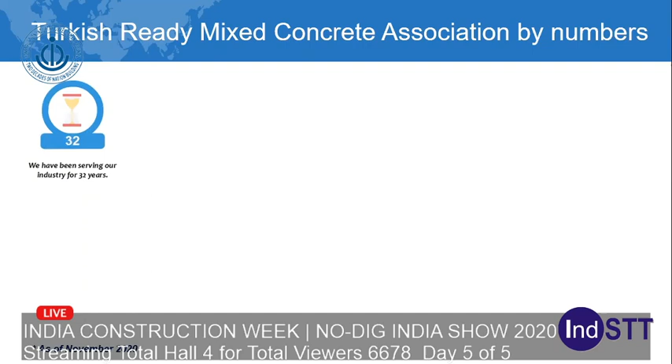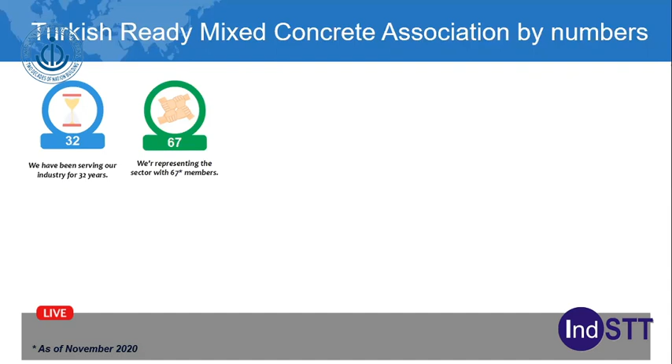Let's start with the Turkish ready-mix concrete industry, and let me introduce you to the Turkish Ready-Mix Concrete Association. We have been serving our industry for the last 32 years. We represent the sector with 67 members, which represents 70% of the whole Turkish RMC industry. We work hard and effectively with our 31 employees, and with 157 industry experts within 4 different committees of THBB.

We have provided trainings to more than 16,000 industry employees in the last 32 years. In 2019, we organized 25 trainings and seminars all over Turkey. In the last 2 years, we have provided practical, economic and safe driving trainings to more than 1,600 operators.

We are a member and the regional system operator of the Concrete Sustainability Council, located in Geneva, Switzerland. This council was founded to implement a certification system showing how concrete and its supply chain are environmentally friendly and sustainable construction materials. In Turkey, we have certified 12 companies, including concrete and cement plants, in the last 2 years. As THBB, we organized 28 congresses, fairs, and competitions in the last 32 years.

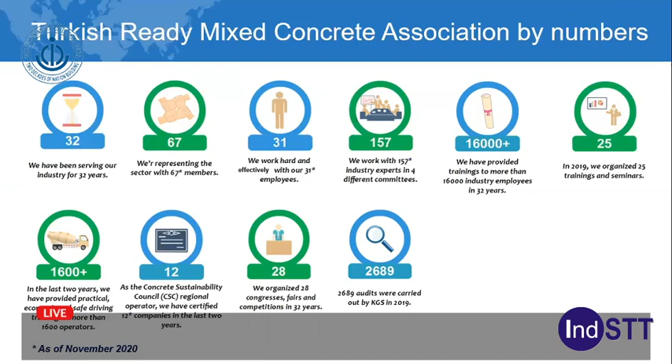We have an enterprise called KGS, a third-party certification body, through which we've performed 2,689 audits in Turkey. We also have a building materials laboratory at THBB, where we have performed concrete strength tests, mechanical tests, chemical tests, and calibration services for all our members and for all the stakeholders.

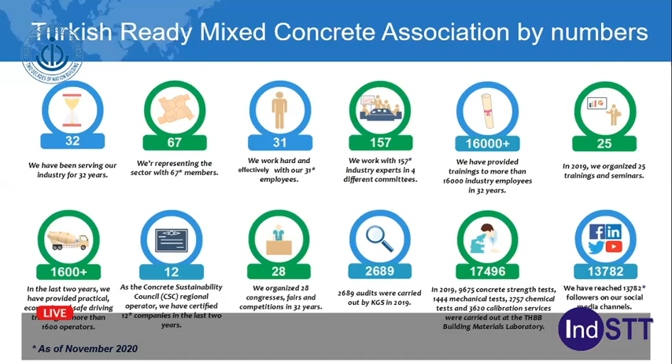We have reached more than 13,782 followers on our social media channels such as Facebook, LinkedIn, Twitter, and YouTube. These are the numbers as of November 2020.

Let's look at the sectoral statistics. Here you can see the RMC production of Turkey. In 2017, we reached a value of 115 million cubic meters. When we started producing RMC in Turkey, by the end of the 1980s, the production amount was around 2 million cubic meters. Now we are producing 67 million cubic meters.

If we take into consideration the amount produced in 2019, the annual production per capita in 2017 was 1.43 cubic meters, and in 2019 it was 0.82 cubic meters.

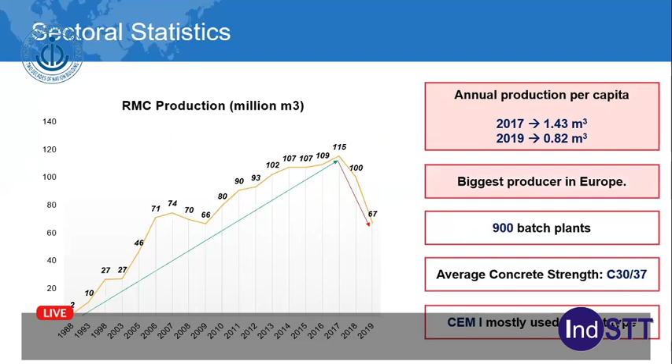We are the biggest producer in Europe. As you can see here, when we take into consideration the total amount produced within the European Union, in 2019 it was around 260 million cubic meters, and as Turkey, shown here in red, we produce 67 million cubic meters.

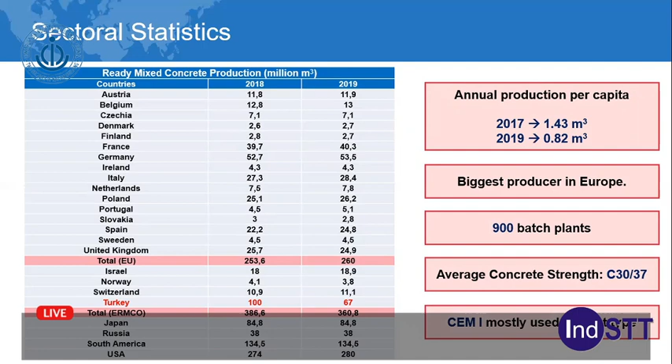We have 900 batch plants in Turkey. The average concrete strength used in Turkey is C30-37, and CEM1 is the most used cement type in Turkey.

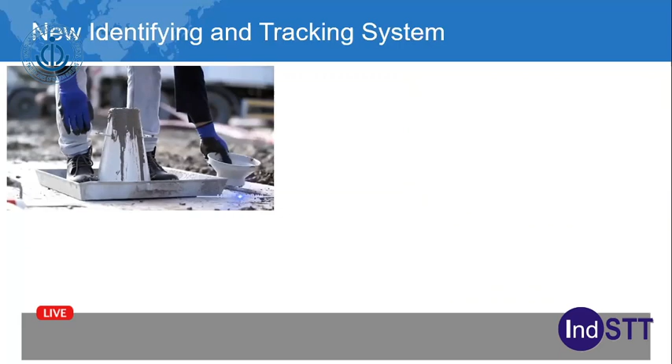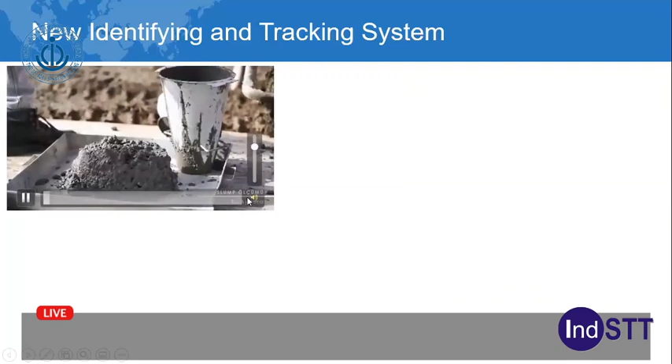I will present very briefly a new identifying and tracking system which is actively used. As Turkey, we have the building inspection system, and in 2019 a new directive came into force to ensure full control of concrete in compliance with the new earthquake code and to enhance the traceability of concrete quality to the end users.

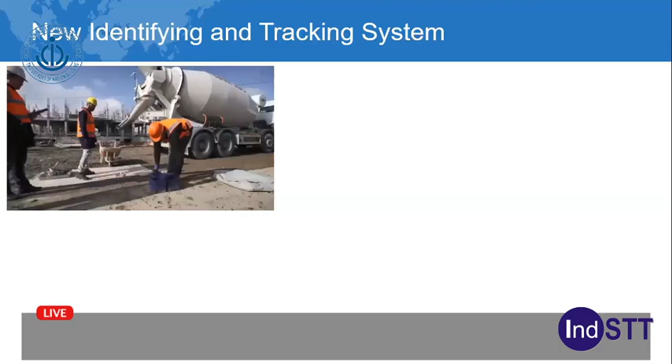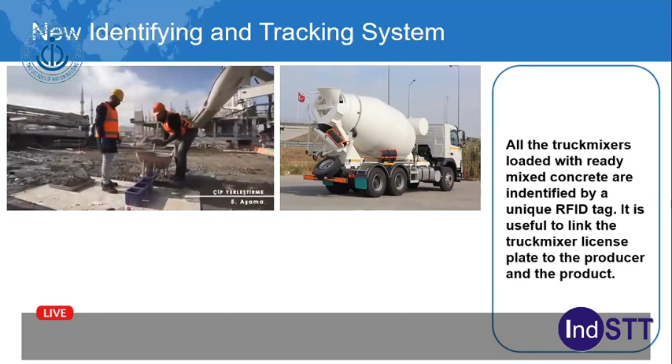For this purpose, all truck mixers loaded with ready-mix concrete are now identified by a unique RFID tag. This is useful to link the truck mixer license plate to the producer and to the product.

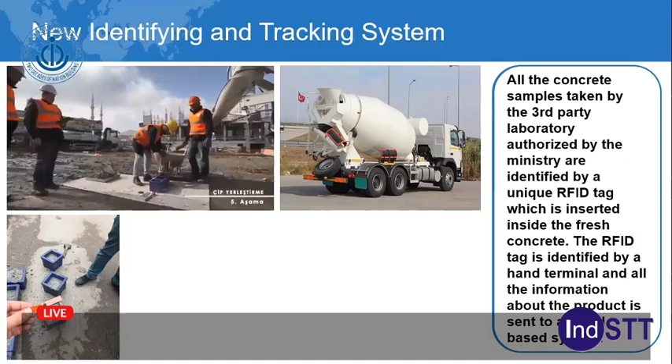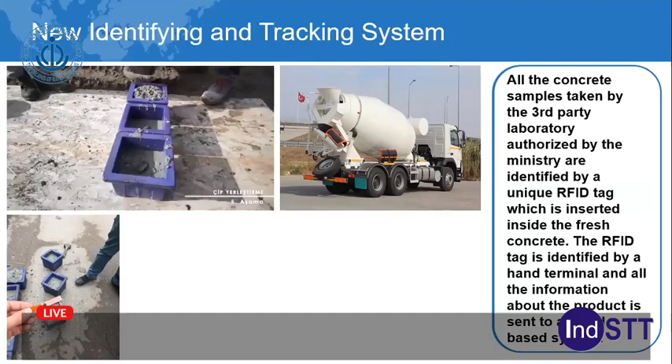All concrete samples taken by the authorized third-party laboratory are identified by a unique RFID tag, which is inserted, as you can see in this video, inside the fresh concrete. The RFID tag is identified by a hand terminal, and all the information about the product is sent to a cloud-based system. The concrete samples identified by a unique RFID tag are stored in curing containers once they are demolded.

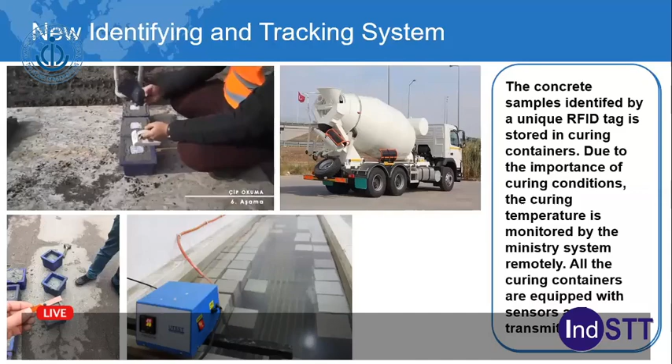Of course, the curing conditions are crucial, so due to their importance, the curing temperature is monitored remotely and digitally by the ministry system. All the curing containers are equipped with sensors and transmitters.

When the concrete specimen is tested to measure its compressive strength, the compression testing machine can recognize the specimen by its RFID tag. All compression testing machines located at third-party laboratories are equipped with RFID tag readers, and after the test, the results are saved by the cloud-based system.

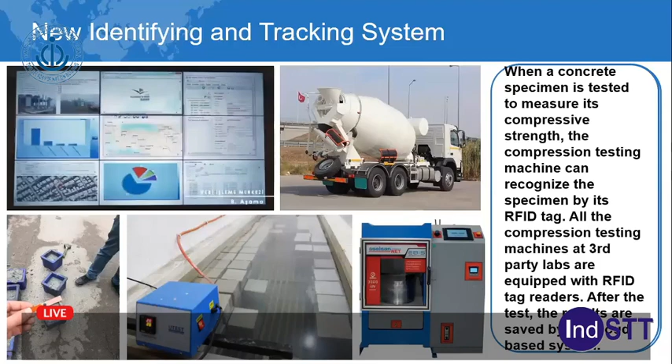By this directive, which came into force in 2019, the identity testing obligation was extended, and the concrete samples are digitally tracked.

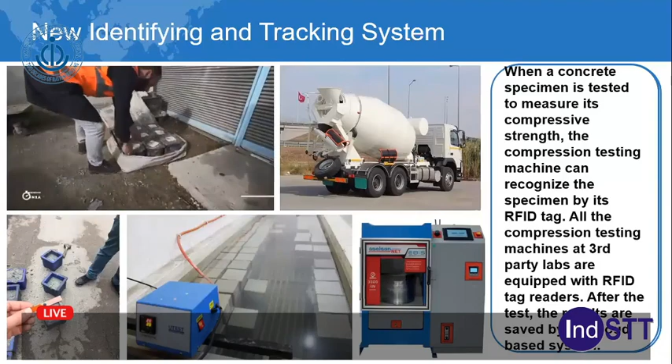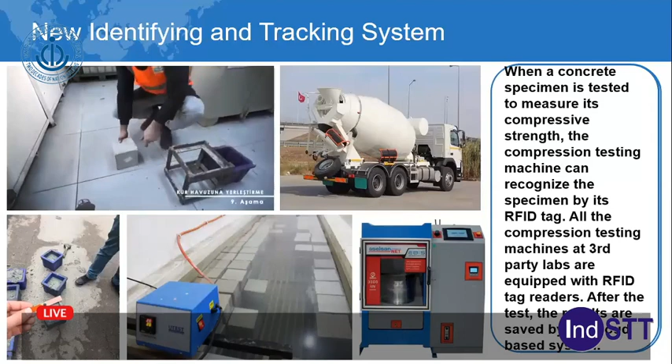Tracing the quality of concrete was the main purpose, but taking into consideration the actual status caused by the pandemic, I think this system is really helpful during this quite difficult period of pandemic also.

After the lockdown, starting from June 2020, an unexpected demand was realized, and the ready-mix concrete production has been continuing at a good level since June 2020.

Let me present you the RMC index. It's a study carried out by THBB in cooperation with an independent consultancy company. This company, on behalf of THBB, collects data from our members, and based on this information, the activity index, the confidence index, and the expectation index are determined. Taking into consideration these three indexes, the ready-mix concrete index is calculated consequently.

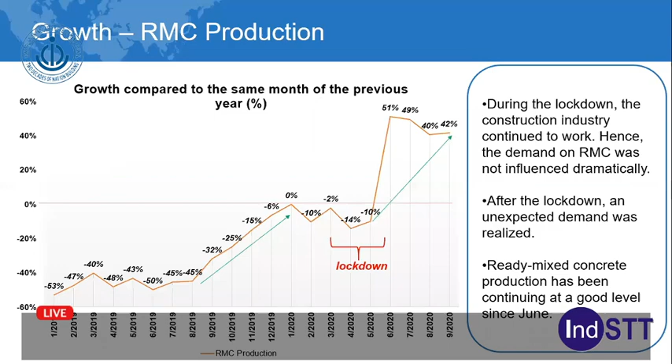So the issues related to the pandemic: cement shortage. Due to the shrinkage in the local market and the depreciation in Turkish lira, the cement producers focused on export. For this reason, the RMC industry had difficulties in supplying cement.

Unexpected demand: during the lockdown, the RMC companies preferred to shrink, both in human resources and equipment. But after the lockdown, unexpected demand was realized, as we've seen in the previous slide.

And the production cost: due to the influence of COVID-19 on the economy, inflation raised and the value of Turkish lira decreased, so the production cost increased.

Uncertainty is another important issue. The pandemic caused disruptions in all processes, and employees' testing and quarantine necessities created organizational problems, especially in production and delivery. Let's look at the best practices.

Here you can see the guide for ready-mix concrete companies during the COVID-19 pandemic. This guide was prepared by ERMCO in cooperation with the Latin American Federation for Ready-Mix Concrete, FIHP. It was first prepared in Spanish, then translated into English, and then all the members of the European Ready-Mix Concrete organization, ERMCO, had the opportunity to translate this guide into their own languages.

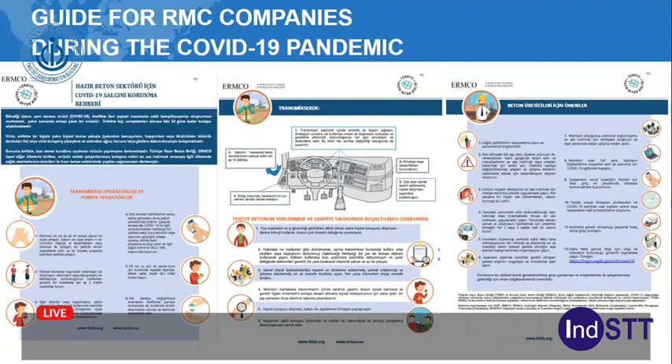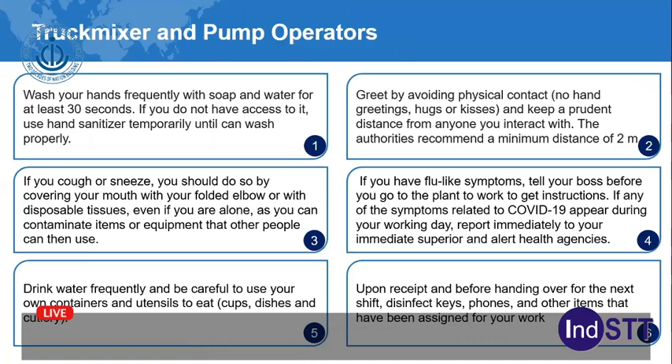The first part gives details on what should or shouldn't be done by the truck mixer and pump operators: what precautions should be taken in the truck mixer, and what should be done during the loading and unloading of concrete.

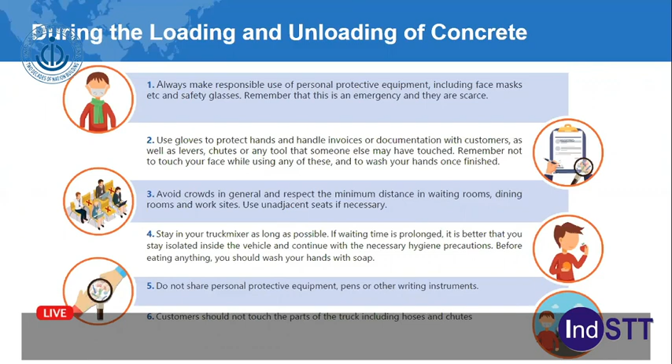If you would like more details on this guide, you can find it in English on the website of ERMCO, and the Turkish version on the website of THBB.

So let's look at the best practices: trainings. Here you can see an example, the hand washing trainings. To raise awareness, hand washing training kits were distributed to personnel, using UV light to mimic germs and spot the remaining germs on the hands after washing, to help them understand how properly or improperly they washed their hands. This is one example of trainings just to raise awareness.

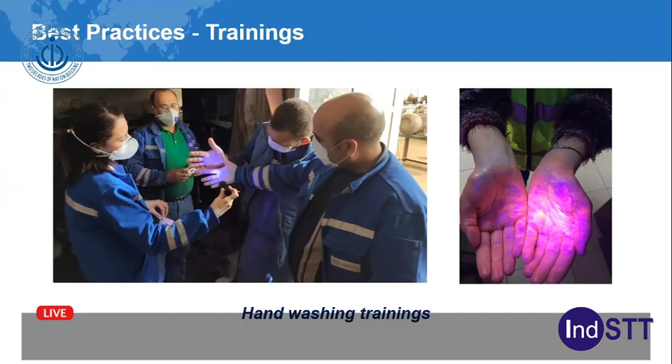Of course, social distance is quite a crucial parameter. So some measures have been taken to ensure the social distance in the plant. For this purpose, unemployed and unauthorized persons are strictly prohibited from entering the power plant and weight bridge cabin.

Operators were informed that they had to disinfect their hands after the delivery note exchange. Masks, gloves, and hand disinfectants were distributed to all personnel. It was also informed that contact with pump controls and truck mixer concrete chutes must be done with disposable gloves. Hand disinfectants were given to all personnel individually.

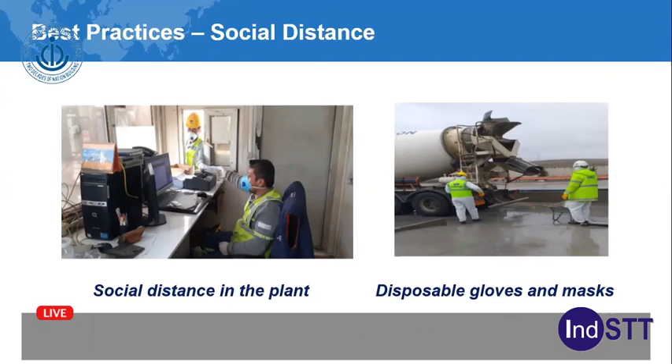Arrangements to maintain social distance have been implemented, especially in the cafeterias. Some separators are placed on the tables, nameplates are affixed to the tables, and only one person can eat at each table in the cafeterias. Meals are served as a package.

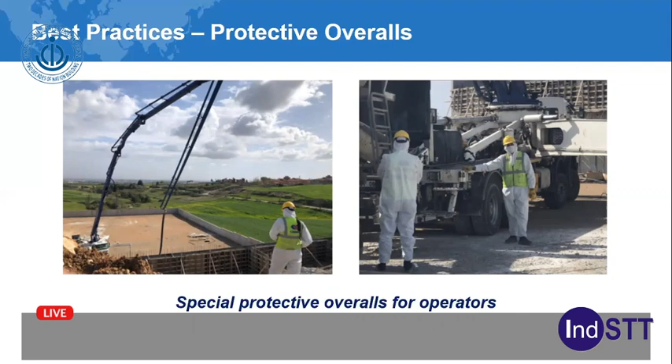Special protective overalls for operators were provided. The operators have to wear these protective overalls when they start working at the plant and when they are on site.

There is daily disinfection and disposal of these protective overalls. At the end of the day, the protective overalls with the name of the staff are subjected to disinfection. Disinfected protective overalls are worn at work the next day.

The protective overalls that have expired are thrown into medical waste bins at the facilities and collected in padded containers, and the waste demand is created from the system to remove the accumulated waste. For the disposal of medical waste, the licensed company authorized to collect the waste is contacted.

Disinfection of vehicles, rooms, and offices: to disinfect all areas and vehicles at the plant, a disinfection device and liquid approved by the Ministry of Health is provided. The application is made in daily periods.

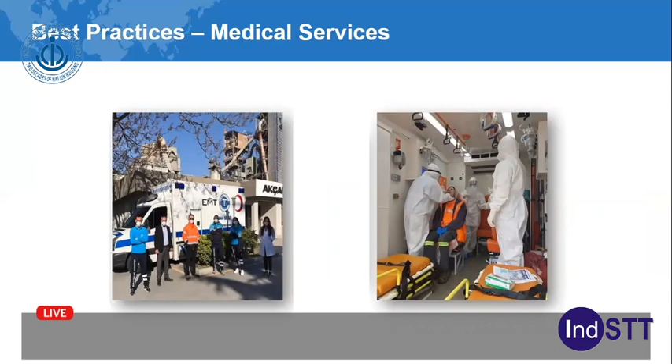Toolbox conversations and trainings are conducted outside, paying attention to social distance rules and special medical services.

A scanning test setup was formed in collaboration with some private hospitals at the plants in order to ensure that the contacts of COVID-19 positive employees take the test.

Consultancy was taken from the medical team specialized in epidemic diseases at the private hospitals for 2 days a week regarding the measures taken at the plant.

An ambulance shuttle was organized to respond 24 hours, 7 days, along with 8 health professionals and the emergency support line. A detailed inspection was conducted by the occupational health and safety team and the medical team of these private hospitals regarding the usage of masks and other measures taken at the plants.

Some employee assistance programs were launched. These programs are accessible to all the employees and their family members, offering 24 hours, 7 days consultancy and information service on potential stress causes that they would like to seek help with.

The service includes medical, health, nutrition, and psychological consultancy via phone, as well as online psychological counseling sessions.